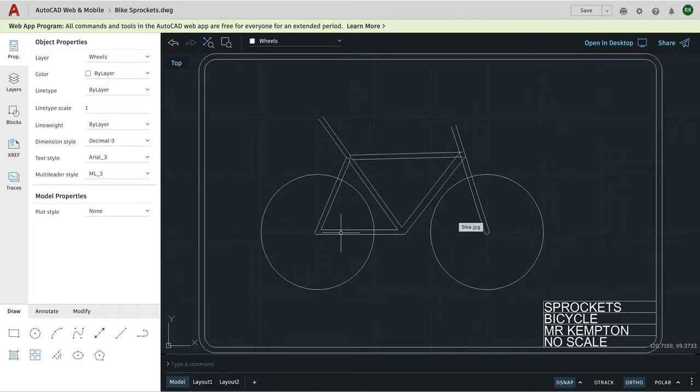All right, so we're going to go back to our drawing. Now I need my frame on my screen so I can pinpoint the 2 starting circles. I'm going to zoom in on the back circle here, and choose my circle tool, and center this right about the middle of the metal bars. It might be better to turn my object snap off so it's not in the way. I'm going to draw my circle, not very big, about that size.

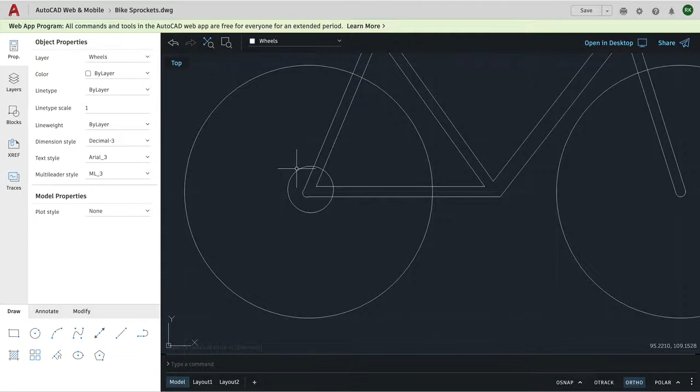Again, we're not measuring anything, we're just looking here and going with what we think is right. So my second circle, I'm going to again just kind of eyeball my center point, and I want to make this circle just a little bit bigger than the other one. Okay, I'm happy with those.

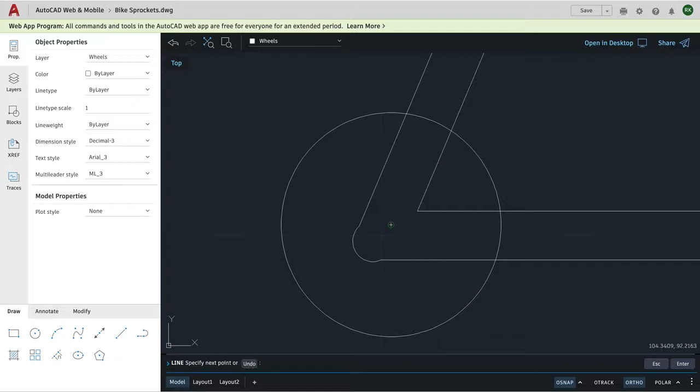So we're going to start on the back circle. I'm going to zoom in here, take my line tool, turn my object snap back on, and go from the center of my circle. There we go, and I want to come straight up. If your line's not traveling straight at 90 degrees, turn on your ortho tool down here - that will lock it into 90 degrees for you.

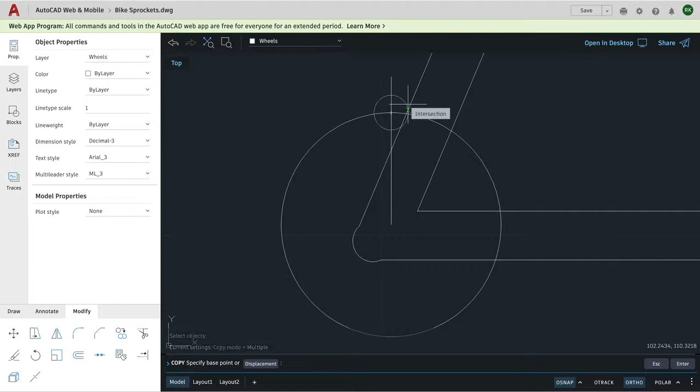So I'm going to trim - before I trim actually, I need to copy this circle because it's really important to keep a copy of this size. Once we create our sprockets, let me show you how to do that again. I'm going to choose copy, click on the circle, hit return, grab it by anywhere, and then just move it over and set it with a click on the side, and return ends that copy.

This is going to be used to complete the sprocket on the front. So I need to make sure these are the exact same size, because when we draw the chain it's going to have to fit both the front and the back sprocket exactly the same.

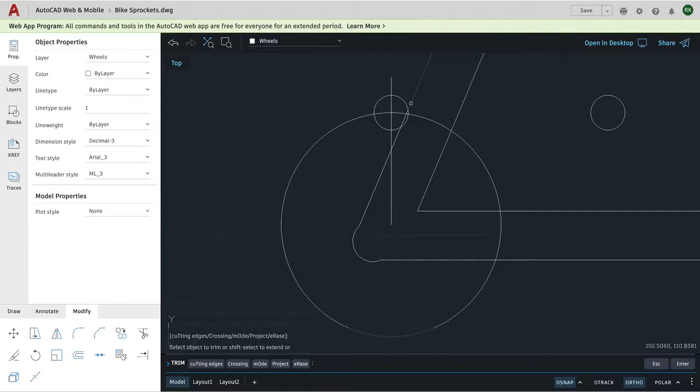So before I do my polar array and run this all the way around, I'm going to trim the top half of it away. I'll zoom in to make sure I get all the pieces - a little piece there, a little piece there, a little piece there. Again, yours may not look exactly like mine because you're drawing different sizes. Yours may be beyond that, it may be short of that. It's totally up to you where you draw it.

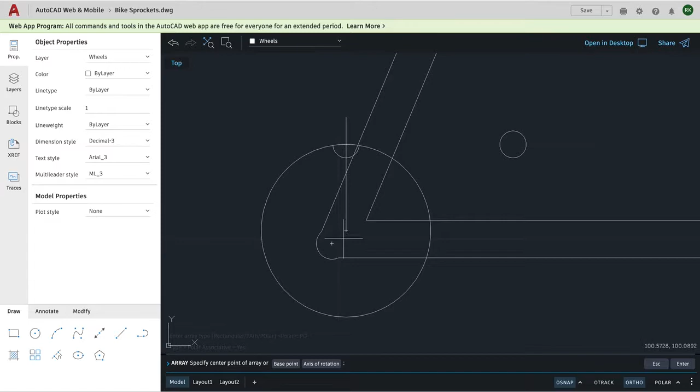Now I want to array this all the way around. I go back to my draw menu, choose my array, select my object, hit return, and now I tell it I want to use a polar array. Specify the center of your array, which is the center of my circle. It's already set at 360 degrees because I've already been using that, but if you need to change that, you can click on the fill angle and retype 360 degrees. And items - how many do I want?

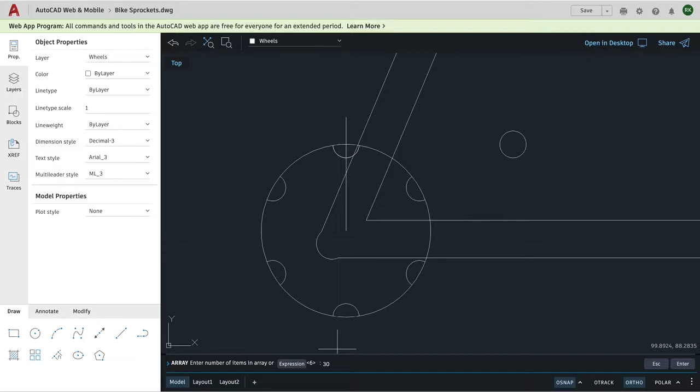Now, I really don't know because I'm just drawing this without doing any measurements, so I'm going to start with 30 and take a guess. Oh, way too many. Okay, I'll jump down to 20 and take a look. Okay, much better, but I don't want this to come to a really specific point, so I'm going to change my items and make it one less than that. We'll try 19, and that's what I want - I want that little tiny space in between.

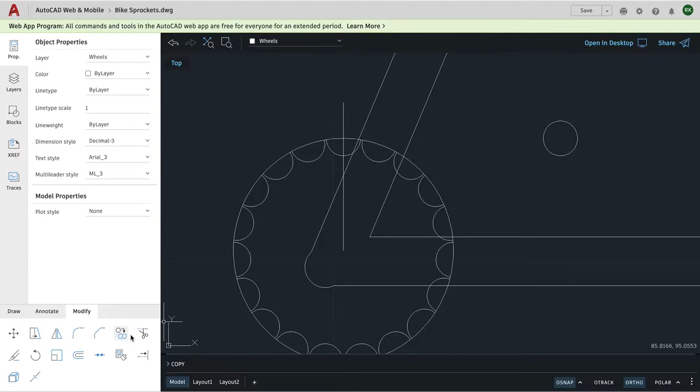Okay, so I'm happy with that, so I'm going to exit the array. And now what I need to do is go to my trim tool, enter, and I'm going to trim away these lines between all of the circles. And that's going to leave me with what I want for my shape.

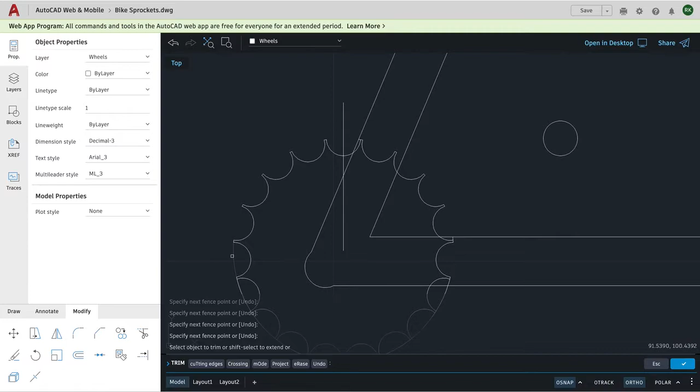Okay, I'll quickly zip through that. I'm going to zoom out a little bit and zoom in here on this so I can finish these off. And that's going to leave me my first sprocket completed. So again, if you want to do another one, you can on the back - you certainly don't have to.

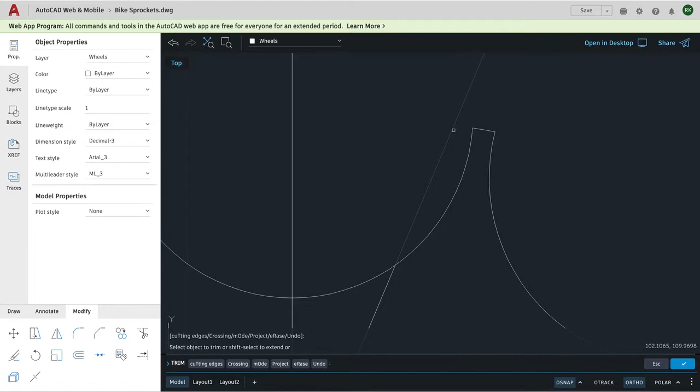And there we go. Oh, I think I missed a little spot right there. I want to make sure I get everything. Okay, so there's my first sprocket at the back.

So if you want to do another one inside that, you can follow that exact same technique. Make sure you use a circle that is exactly the same size. That's why we saved this one right here. So I'm going to zip up to the front now.

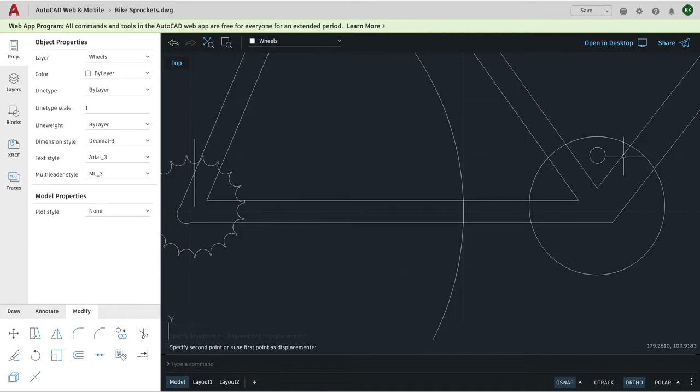I'm going to move, click, return, click and drag. Let's move this over so I can zoom in on the whole page here and get that in the right space. Right there will do.

And I'm going to repeat that process. This time, the numbers are going to be a bit different because I have a bigger circle to start with, but it should work out just the same. So I'm going to draw a line from my center point. My O-snap is turned on, and that line will go straight up.

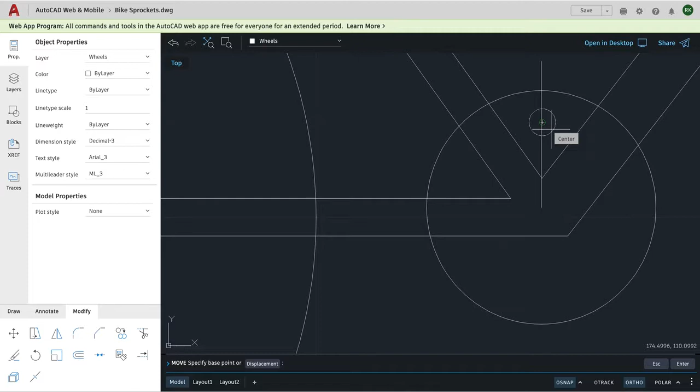So now I want to move this circle. Back to modify, choose my move option, click on the circle, hit return, and I want to grab that circle by its center. You'll see its center is now highlighted because my O-snap is turned on. I'm going to turn my ortho off so it allows me to move anywhere I want.

And I'm going to snap it to that intersection right there. And I'm going to go through the exact same process with this circle now on the bigger sprocket at the front. So that means the first step is to trim away the top of the circle.

Oh, hang on, I'm going to get myself in trouble here. I'm not going to trim just yet. I'm going to make another copy of that just in case I want to use it again to do another sprocket. So I'm just going to set it aside again.

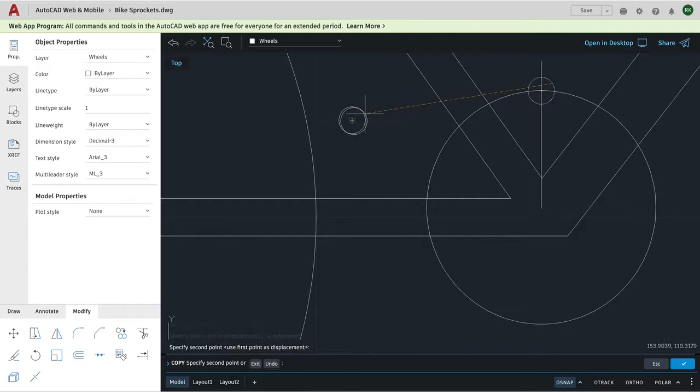Enter finishes that command. Okay, so now I can go ahead and trim the top edge. 1, 2. Enter finishes that command. I want to draw a polar array.

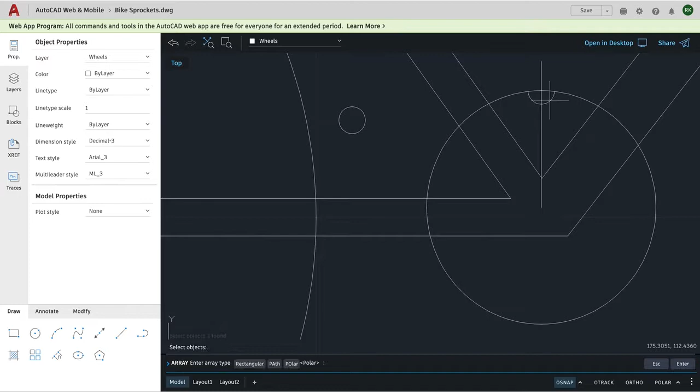Select my object. There we go. Hit return. Array type, polar. Center point of your array, the center of your circle. And angle, I already know is 360 because I see it going all the way around, so I don't need to change that. But if you do need to change it, click on your fill angle.

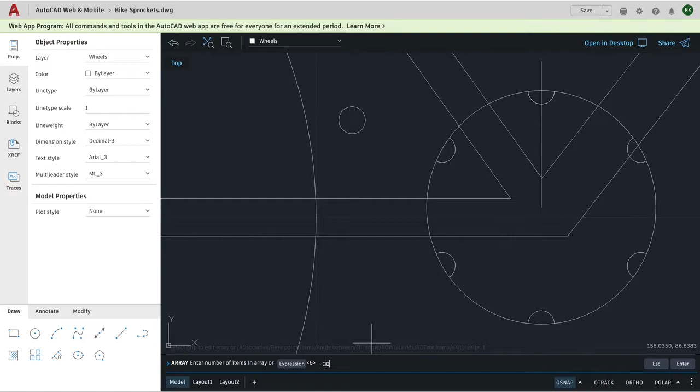And items. All right, I'm guessing again. I'm going to go with 30 again and see what happens. Too many, they're overlapping. So I don't need to go as low as 20, but I will reduce it to maybe 26 and see how that looks.

Okay, I'd like that spacing to be a little bit bigger. So I'm going to zoom out and take a look at them both at the same time here if I can. So that one is that size. That's pretty good. I'm going to go one more smaller. So I'm going to go 25 and see how that looks.

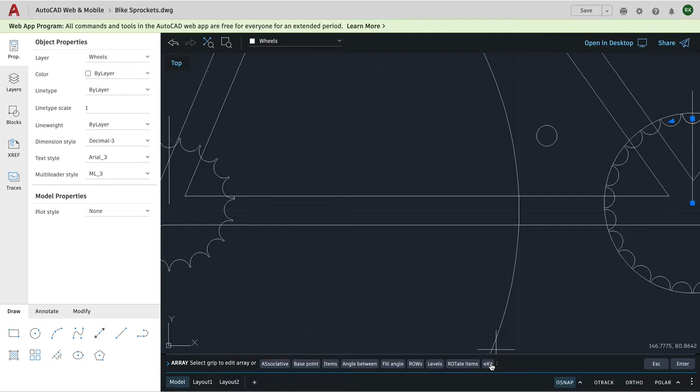Okay, to me I think that is better. So I'm going to go with that. And I hit exit and I'm done.

Okay, so the last thing I need to do now, I'm going to zoom in so I can see that. And I need to get rid of these pieces. So I'm going to go back to modify, trim, return, and I'm going to click all the way around the outside again, getting rid of the pieces I don't want. And that's going to leave me with my nice finished sprocket.

Now again, while I'm doing this trimming here, I'll just remind you that it is very important that we use the same size circle. That's why I keep copying the initial one. And if you don't use that same size circle, that's going to be trouble for tomorrow's lesson, because in tomorrow's lesson, we're going to draw a chain that's going to connect the front and the back sprockets together, just like it does on a real bike.

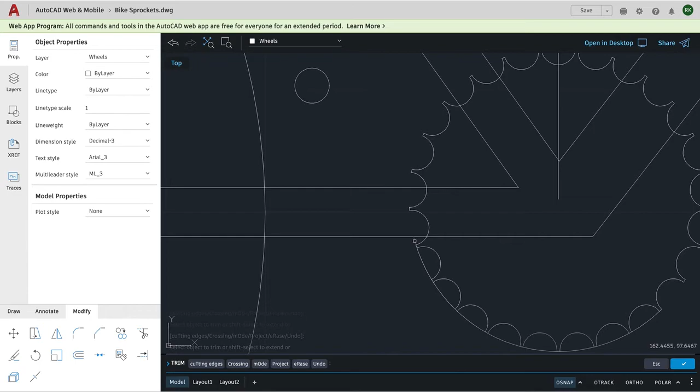And all of the links in that chain are going to be the same size. So that means the holes in the sprocket need to be the same size, front and back. So hopefully you make that work, and then tomorrow's chain will fit perfectly into the drawing that we have created.

Okay, so there we go. We've got our front and back sprocket looking good. And again, if you want to impress me, draw another one inside here and even a third one like you see in our sample bicycle.

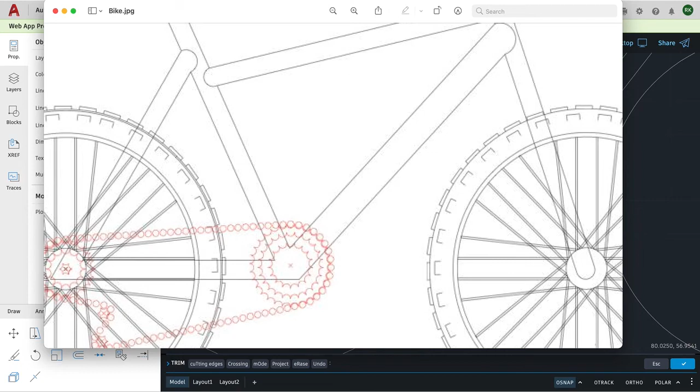We have 1, 2 on the back and 1, 2, 3 on the front. Okay, so that shouldn't be too difficult. I'm going to leave these lines on here right now because they'll be useful for tomorrow's lesson when we go to draw the chain. And again, using the array tool, we will do a rectangular array tomorrow and a polar array, so we'll get to practice that a little bit more.